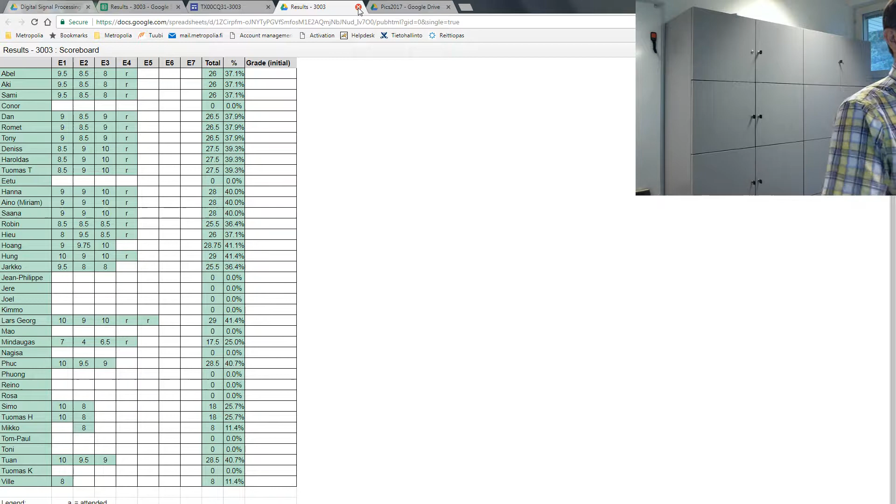Okay, back to business. So, control - but before that, let's go through this stuff on the whiteboard. What to remember from signals? This is basically a review.

The most important part to remember from signals is that we handle sampled data sets. We have x of t, a continuous time system, and when we sample it, we take samples such that we have index n, which is just a running number, times the sample time, which is also 1 over the sample rate.

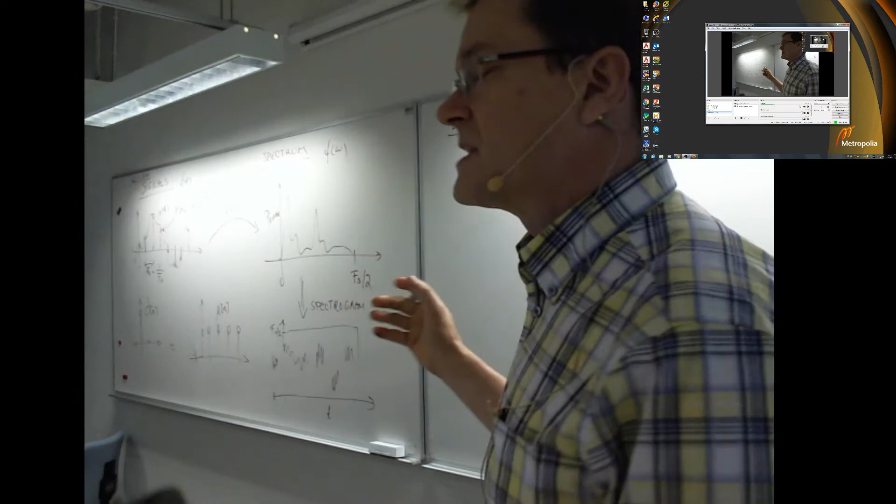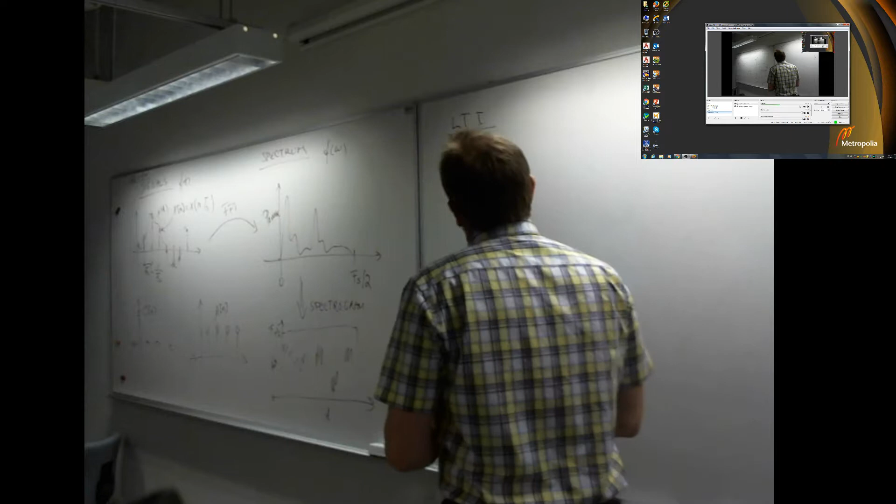Is there anything else on signals? Maybe, but let's move on. On the system - if we're talking about linear time invariant systems, we had that one small exercise about when a system is linear, time shift invariant, causal, and whatever.

Stable, linear time invariant systems can always be expressed as a difference equation, which has the sum k from 0 to n of bk times x n minus k, minus the sum k from 1 to n of ak times y, n minus k. This is the data and its history, and the history of the output. These terms are the filter coefficients or system parameters - plenty of different names. And showing k from 1 means that a0 is always 1 in this representation.

In time space, you have the difference equation, and you also have the block diagram. The block diagram is basically an implementation of the filter, how the calculations are actually done. So this is implementation.

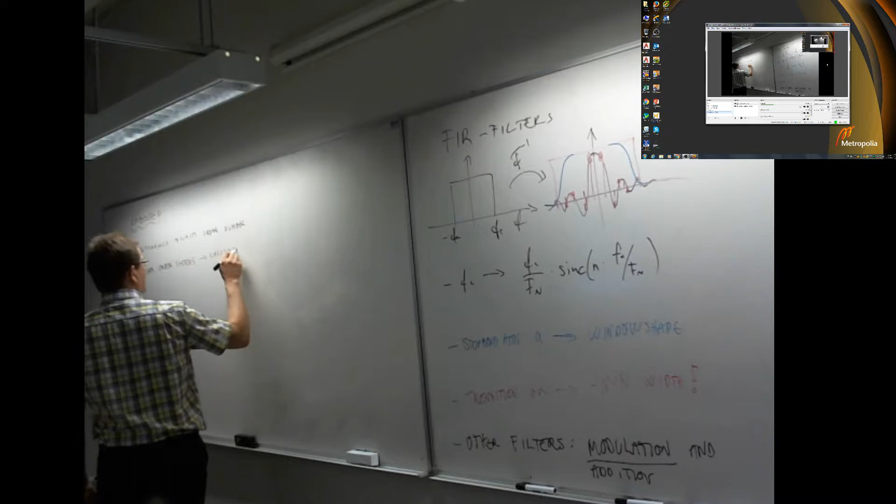Couple of things there. First one, of course, is the performance. That limits how big a filter you can use - practical limitation for how many calculations you can do for a single time step, the order number of the filter. And then the calculation inaccuracy practically means that higher order systems are always divided into second order sections, meaning those will go into cascaded second order sections to actually have good computing accuracy even with limited number of bits.

Okay, and now, with this quick review, we can go into today's topic - not that one - it's system control.

Ooh. Yeah. Yes, it's nice, and it's very expensive. And it's even more expensive to actually keep it in good condition. It just needed new brake discs on the front, of course, then the brake pads, and now it doesn't have any lambda sensor anymore - who needs lambda? Which means it's a little bit tuned up. At the same time, it's a lot of fun now, and very expensive to keep in running condition.

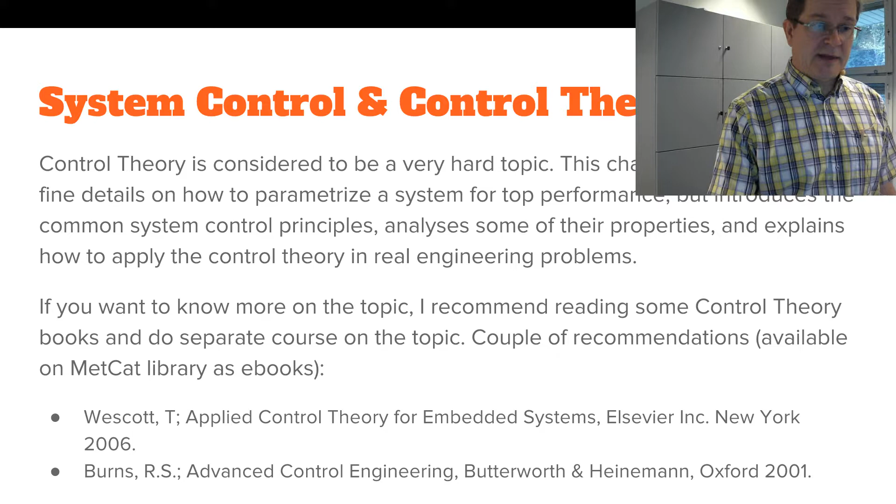And there are a couple of good books I found. Wescott's Applied Control Theory for Embedded Systems, yes, it's applied, very close to the book I would write myself. It has a very practical point of view, with real life examples, sort of. The other one is a good review of control engineering overall.

So basically in control theory or control systems we have two sorts of control. One is open loop, so that's kind of like I wish the temperature was this in the classroom, but I would have no feedback, just a wish. No feedback of measuring the temperature or anything, just sending a command, okay, now do that. The same way, do you have feedback on your system when you're trying to control the speed? Okay, yeah, that's why it fails.

If you don't have any control or feedback from the system, if you're not measuring speed or position or something like that, you don't know how the system is behaving when you're sending a command. So yes, very limited control.

But anyways, a classic example is an electric block heater for a car, which is just a timer, or actually a heater element that you time externally with the block heater outlet. And then you can also burn your car with that, practically.

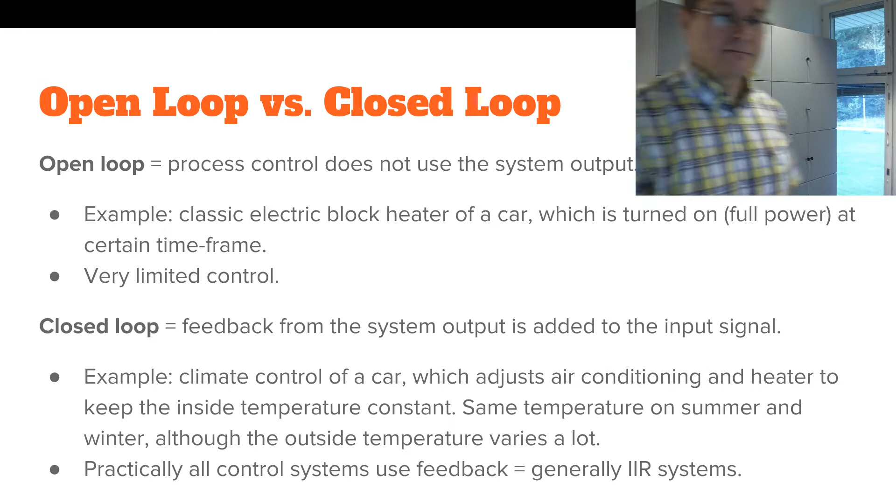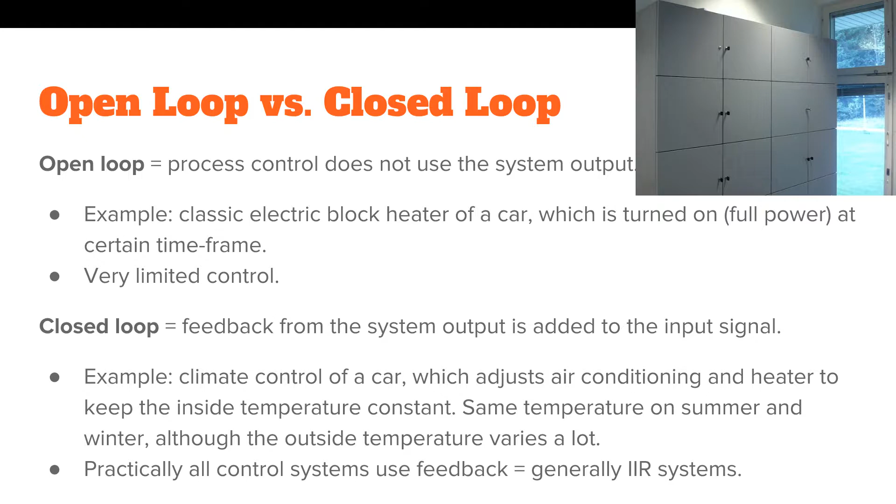Closed loop controllers are the ones which have some sort of feedback, so it measures the outcome and tries to adjust the system to actually get there. So all control systems which use feedback, or practically all do, and generally those are IIR systems. If you add a thermostat or something like that to an electric block heater, it becomes a closed loop system, it has feedback, cutting off the power before your engine block water starts boiling.

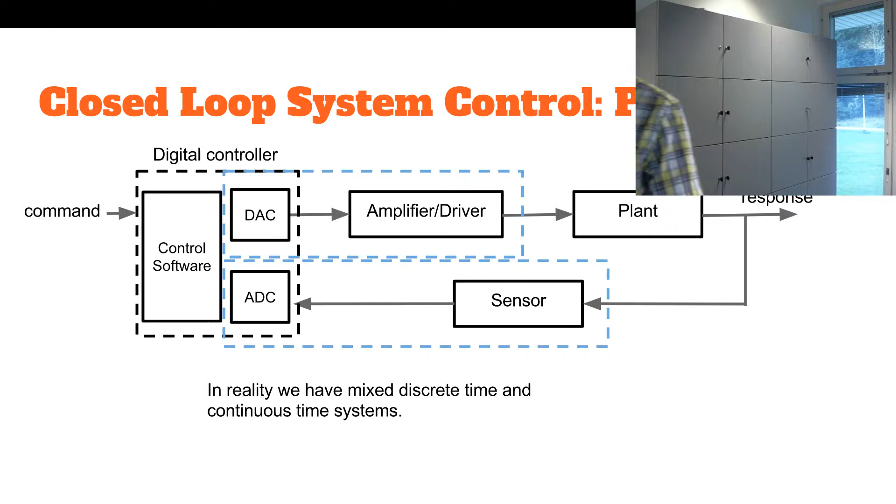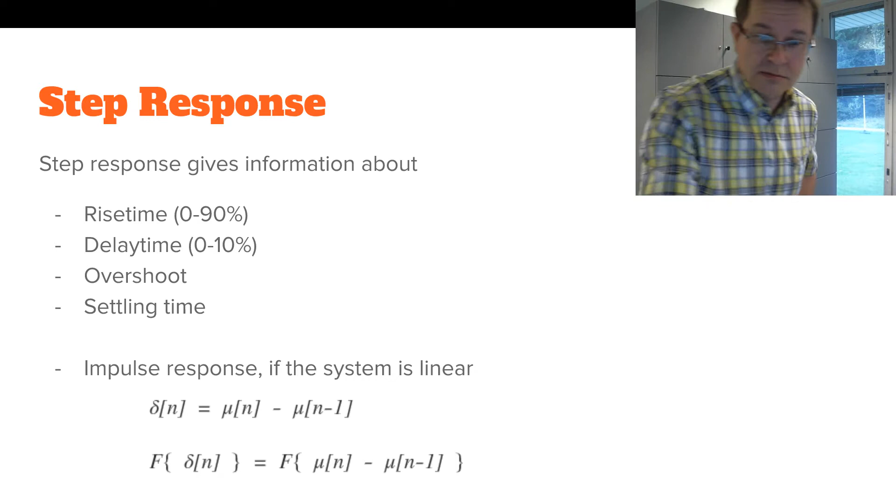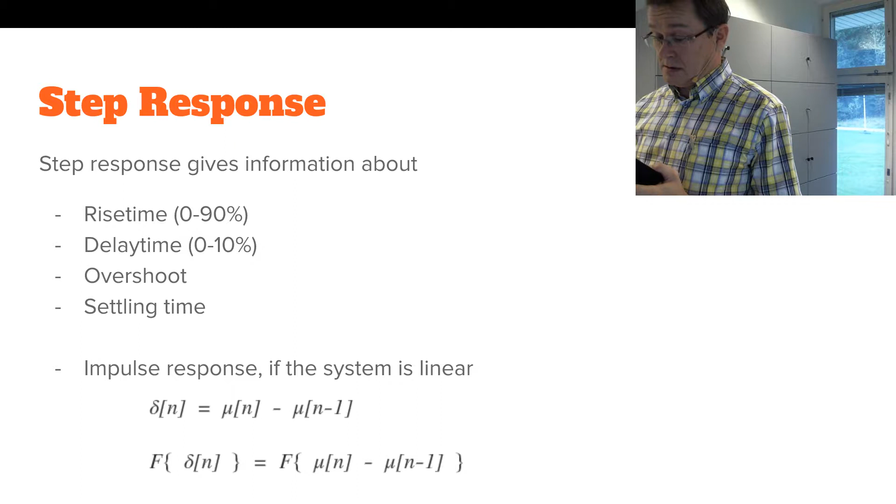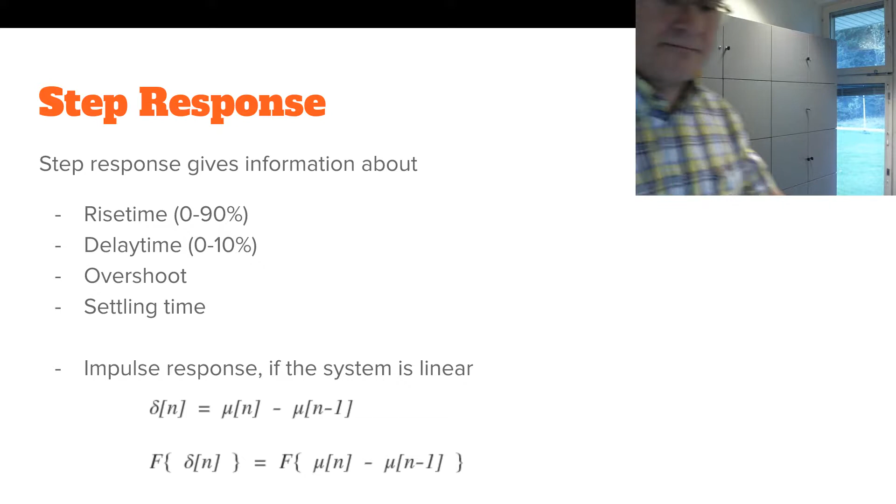Some tools. So the first tool is called step response. Just a moment, I'll check which pictures I have - I have that one already, so I don't have the embedded one. Step response is used with controlled systems to find out if a system actually behaves nicely, meaning that whatever the system is, you would send in the system transfer function's input and check what the output is.

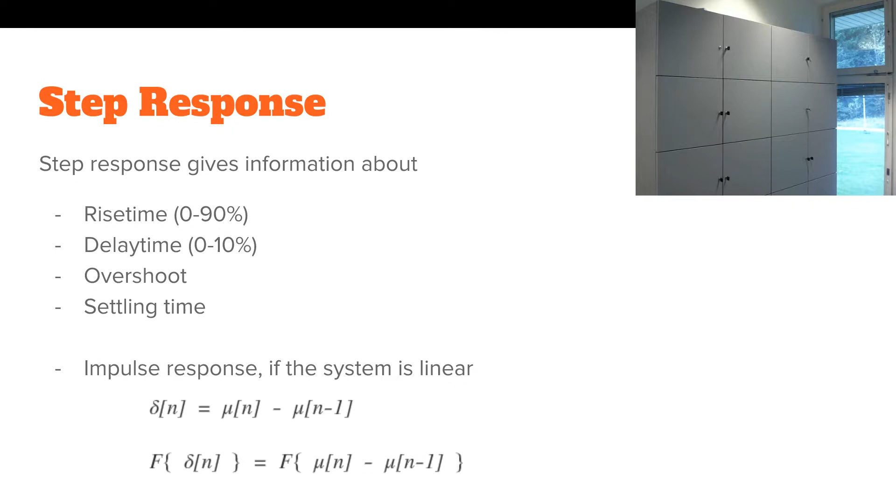Final value theorem. That requires some calculus when you do it by hand - yes it does. But anyways, this is the fine way of calculating the DC gain of the system.

The final value theorem tells you that you don't need to wait for infinite time to calculate the last value of the system. You can derive it from the Z transform of the signal, meaning the transfer function of the system or control system loop transfer function. You multiply that transfer function with Z minus 1 divided by Z, and then multiply it by the step function. Then you get the final value simply by checking what the value of the transfer function is when Z equals 1.

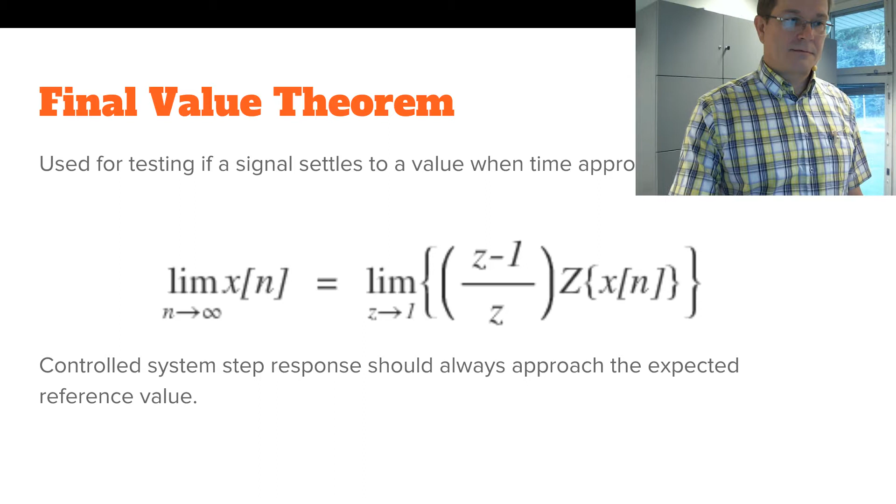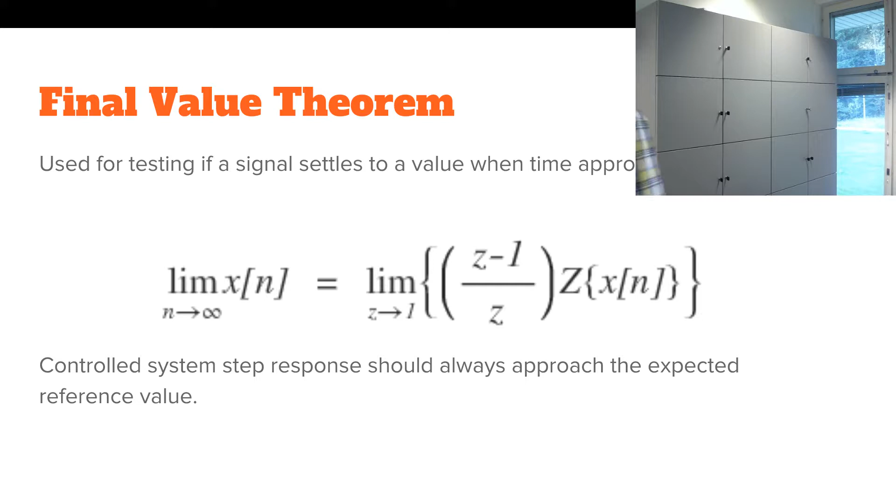There was also a notification that controlled system step response should always approach the expected reference value. Otherwise it doesn't control.

Then you might end up playing with the blocks. We already had this with the filters. If you have two parallel blocks, the system transfer function for parallel blocks is just the sum of the transfer functions. For cascaded systems, that was the way we did it. Second order section division, we had cascaded second order systems that gives exactly the same transfer function as the original. That's how you calculate those. It's not that hard either.

On this analysis of systems, sometimes you need to change the order of summation on a block diagram, so how to move the plus block. Consider this sort of system. Basically we have here, for example, x1z and x2z. These are the Z transform signals, exactly the same thing as x of n, x of 1n or x of 2n. You can do the calculations in a similar way.

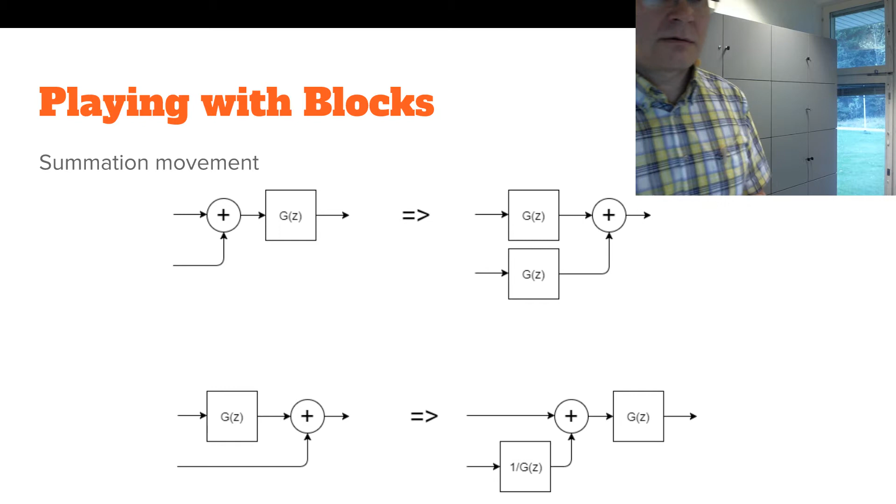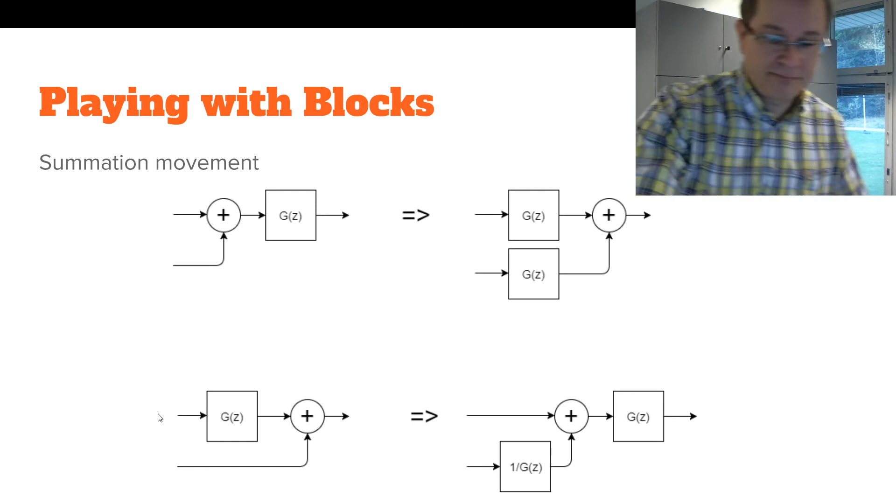Same way, if you had the transfer function only on one of these blocks or signals in the lower graph, you can basically move that one. Let's see if I can do that, I need to take a couple of pictures again.

We had the same thing going on: x1z to g(z), and that to the summing junction, and the other input here is x2z, which also goes to the summing junction, and the output is g(z) times x1z plus x2z. If we want to have the common multiplying factor on the output, you can mathematically say g(z) times x1z plus g(z) times g inverse of z, which is the inverse transfer function, times x2z. So if this was numerator divided by denominator, this is the vice versa, you just swap the numerator and denominator.

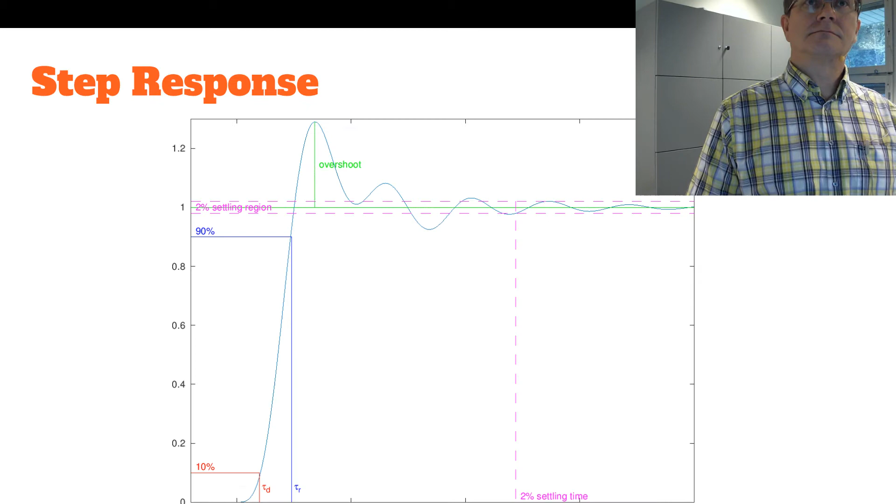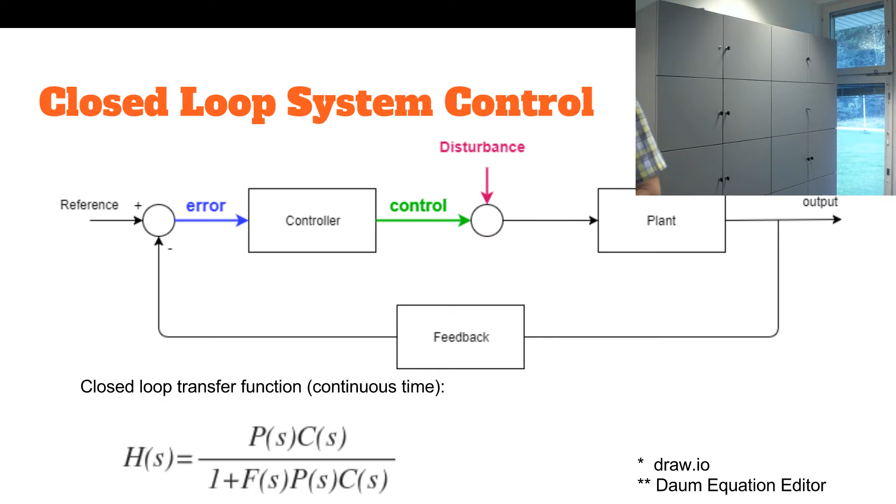Where did I forget the disturbance? Nowhere. Although any system usually is quite non-linear, for the control point of view, if you have a short enough time step or enough resolution, then you actually end up being quite linear at that control point. So basically you can assume that for the control point of view the system would be linear, and the whole control system would be linear, which means that you can actually apply the superposition principle.

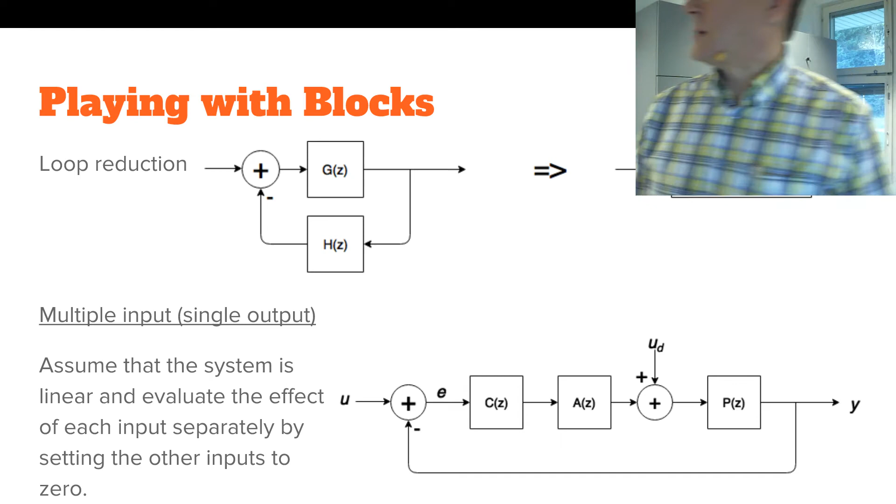Superposition principle is the best thing after invention of the wheel, since now you can actually take each of those signals and analyze them separately. In control systems, it's quite nice behavior, since now you can actually, so let's see this u.

That's just u. U minus plus, that's the error signal. Direct feedback, meaning we have an ideal sensor with no feedback, this transfer function, meaning that it directly measures what it's supposed to measure. And then we have this C of Z, and this one is the P of Z, not plant, no, I'll take a shortcut on that one. So A of Z, there's the actuator, meaning that in addition to this control, this is usually the driver, which is separate and has its own transfer function, but here it's included.

That's the disturbance signal, UD. And then we have the plant, feedback like that. For input-output, transfer function for input-output relationship, U to Y would be same as in here, although the GC here is the PZ times C of Z.

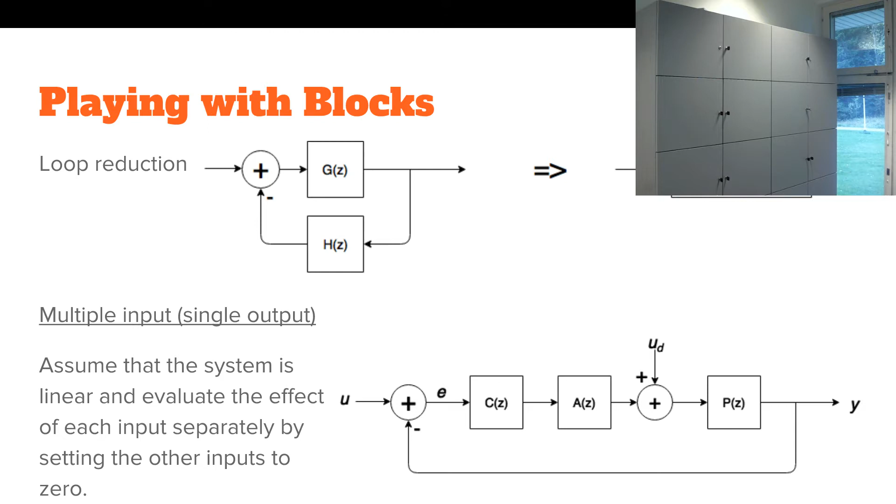On here, what you would like to have is as little as possible effect from the disturbance signal. So basically, for a good system, the step response of the disturbance signal should look like that: as little as possible ringing effect, and settling as soon as possible to zero. No effect, good.

All right, basically there are three, I would call these classical controller systems. So we have P, PI or PID controllers, and in some very rare occasions we may have a PD controller.

Anyhow, what are those P's? Just a reminder of the closed loop control system, that's what we are talking about. Now we are focusing on the controller. The plant is what it is, feedback on the control output is also what it is.

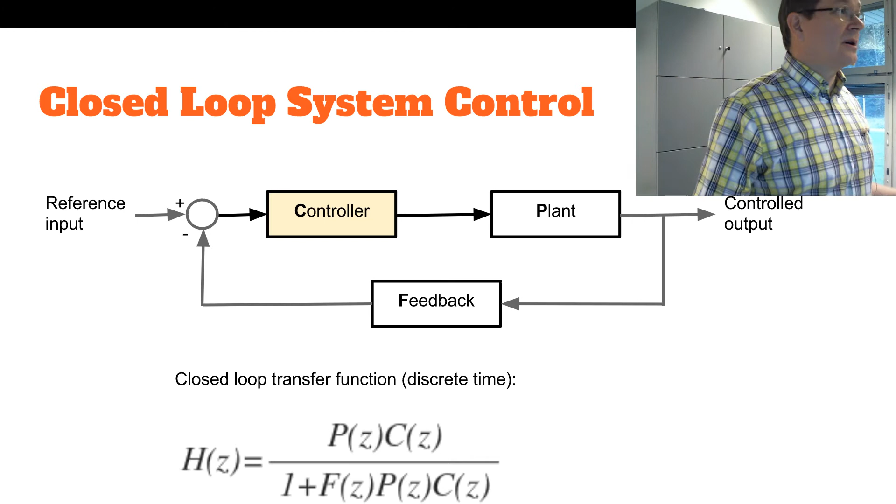Now, what is the controller? Basically, proportional control is a simple single gain block, meaning that after the reference, there's a difference between output and reference, and you use the control signal which is directly proportional to that difference, just a plain single value. That's the simplest controller type. You just feed it into the system, and I'll draw you a small diagram here.

What happens for a P controller? For a step response, if you're running a step response, you have this nice graph. So that's your reference value or desired value there, which is also the same as the DC gain, should be 1.

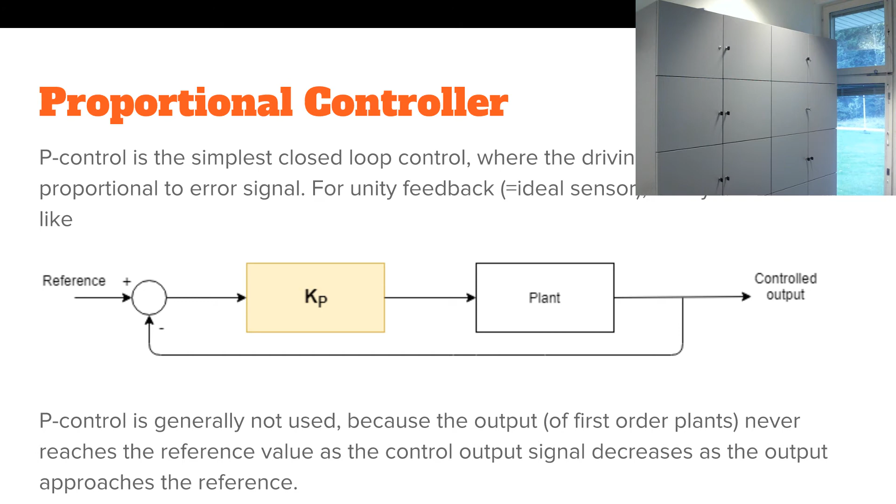No, good. All right, but anyway, so the P controller has just the controller - the transfer function is a constant, Kp.

All right, but this is the most commonly used controller in industrial applications: proportional integral control.

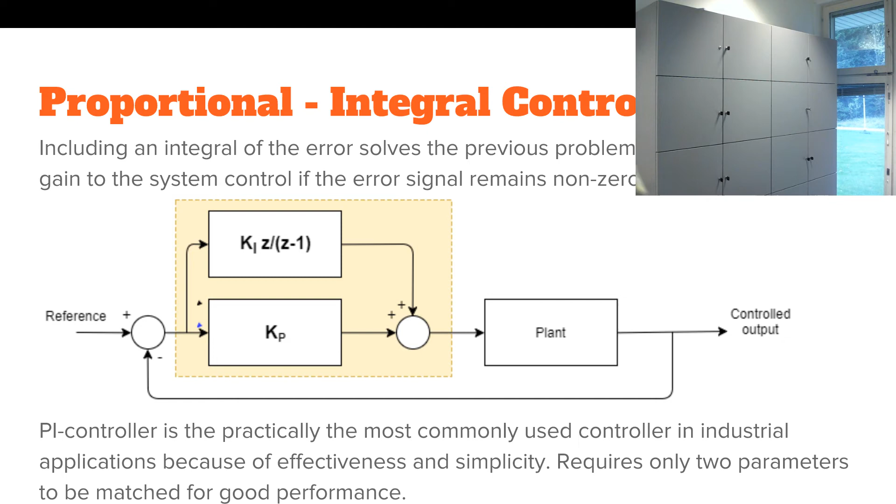Basically this PI controller - let me see if I can fit all three here. While the P controller decreases the signal as the error signal decreases while we're getting closer, this one has a smart way of also calculating the integral of the error signal, so that we start adding up. So if the output is on either side of the reference value, the integral proportion grows greater and starts pushing it more into that direction, closer to the final value.

So, PI meaning it still has the proportional part of the control, but then it also has the integral of the error signal, and that's fundamentally how the integral is marked.

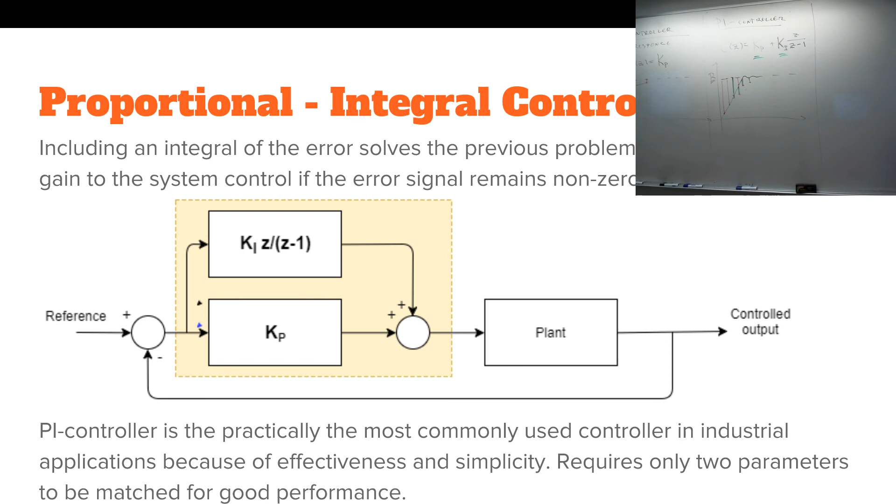And when you are optimizing, it's easier to optimize just 2 values than 3 values. Usually this is a close-enough controller. Although mathematicians and engineering teachers, they love proportional integral derivative type of controller because it's so beautiful. I haven't found any other reasons why anyone would like PID controller.

It actually gives some speed for the disturbance transfer or disturbance effects, since this basically feeds back some derivative of the error signal, meaning that if the output changes rapidly - and it usually changes rapidly only because of the disturbance - since you have all the power to run your control not just step but also with the ramp, you can stabilize the input for the system, but you cannot do anything for disturbance of the system.

So for highly disturbed systems, which basically are, say, industrial applications where you have a very demanding system, some of these systems are closely related to others, so one system's action will cause something else for the next system. For that kind of complex systems you would need PID. But for example, on those motor controls you are playing with now, PID will be overkill, since you do not necessarily have external disturbance there.